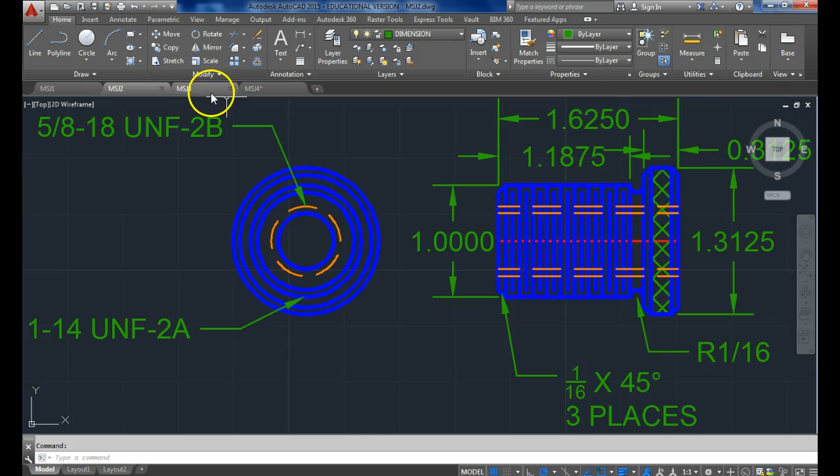Alright, now that I have all four parts - the base, the screw, the telescoping screw, and the end cap - now I'm going to put them all together.

So I'm going to open my title, file, save as, MSJ, assembly.

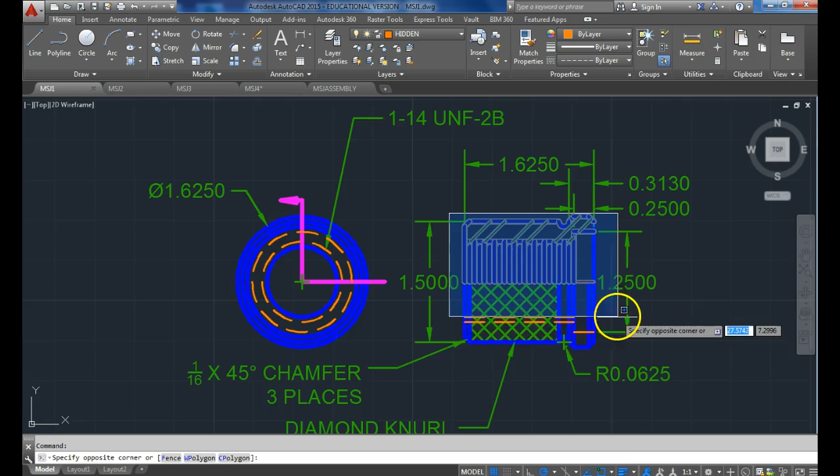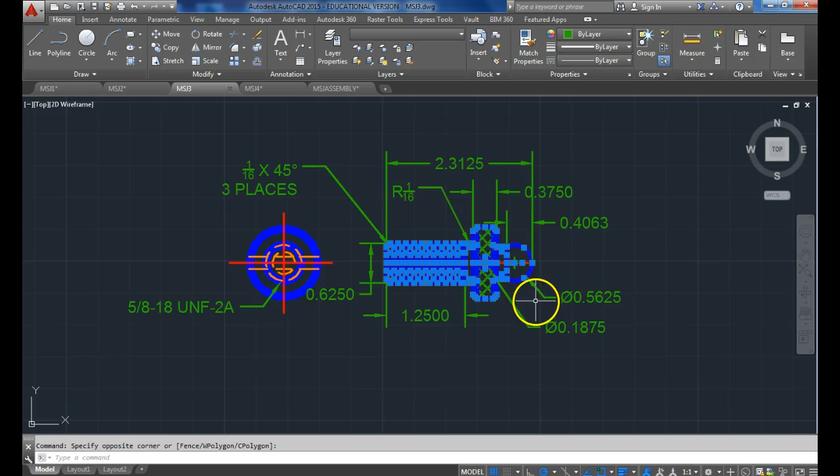Alright, same as before, I'm going to just cut and paste pieces. So here's part 1, part 2, part 3, and part 4.

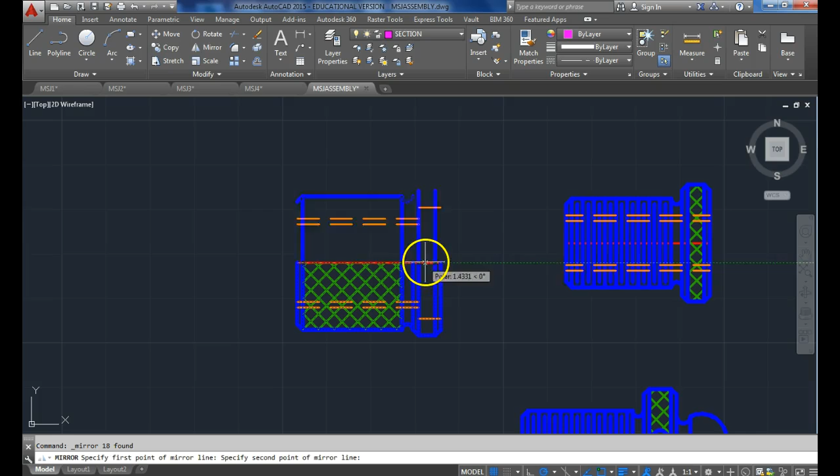Alright, first thing I'm going to do - I don't need the internal stuff, I'm not going to have the section view. So this one, I'm going to trim everything I can, delete all this stuff, and then I'm just going to mirror this whole thing up. That way it's completed, I have all my external stuff. You can get rid of the hidden lines.

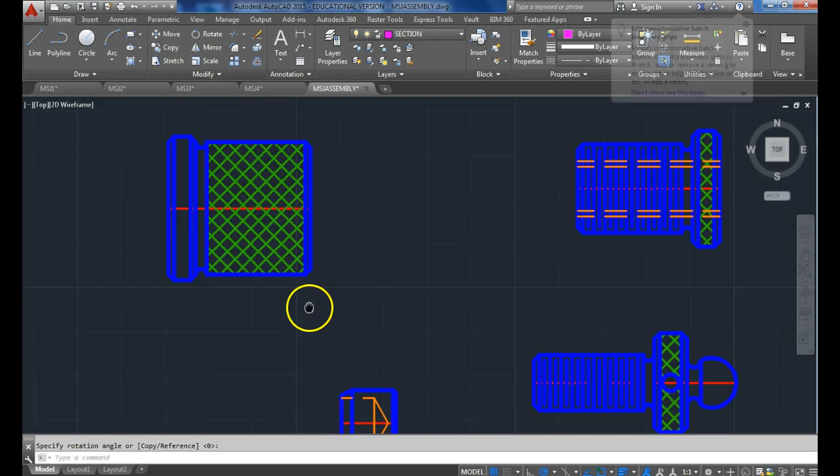And then I'm going to rotate it so it's facing the same way as the other ones. Alright, now putting them together in order. Next one is going to be part 2, the second thing we did.

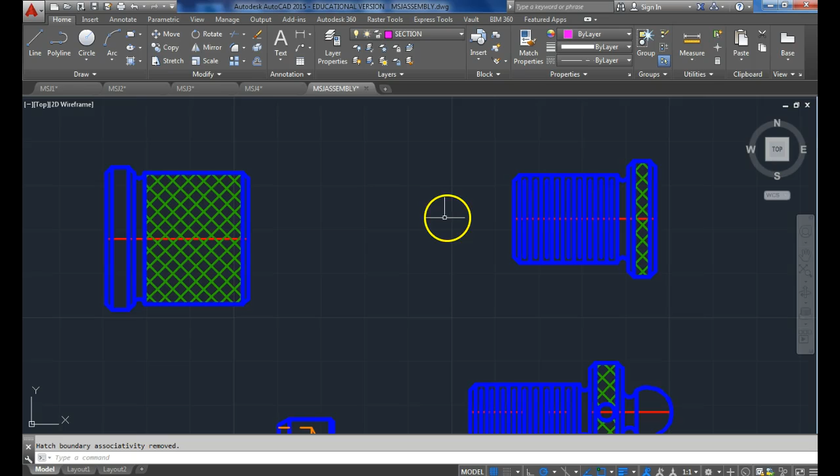And get rid of the internal stuff. They were internal threads in this thing. Here's external, they get put together. It's a jack for leveling something out, so how many of these threads is really how far you have it screwed in or out. What I'm going to do is leave one thread exposed.

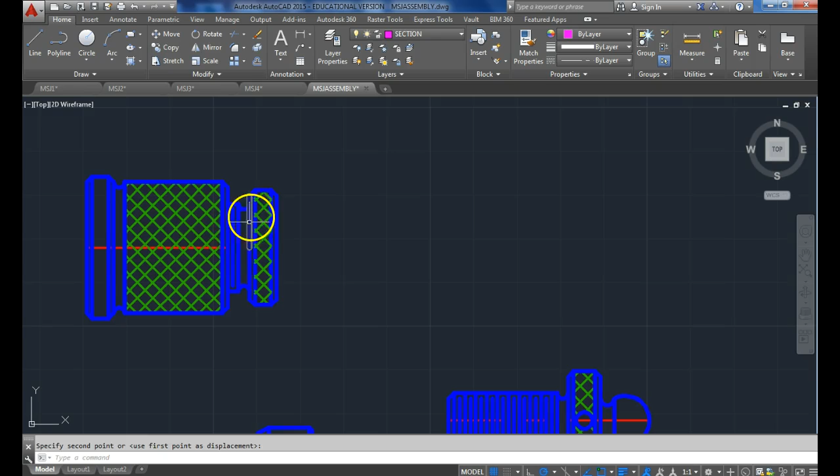Now I'm going to trim all this, delete all that. Move, select it, grab by this point, line up with the midpoint. So it's like I took this piece and screwed it into here.

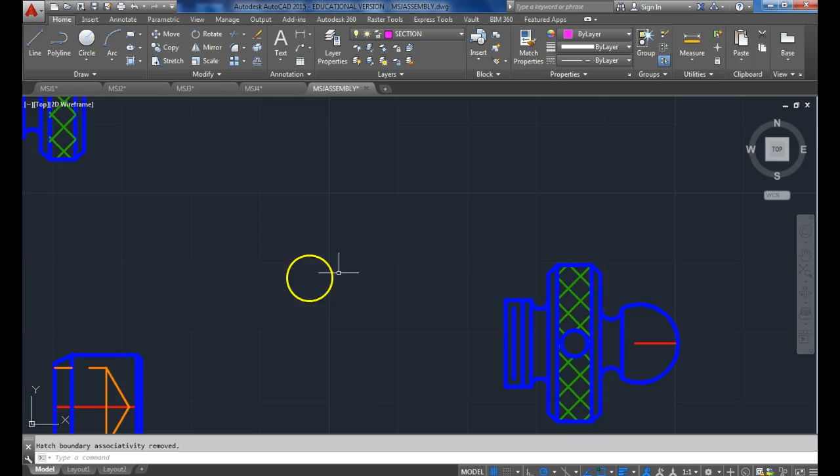Now this piece is going to get screwed into that one. I'll do the same thing - pick a thread to stop it at, trim the extra, delete what I don't need. Like that, bring it over, place it. Alright, those three are pretty easy to put together.

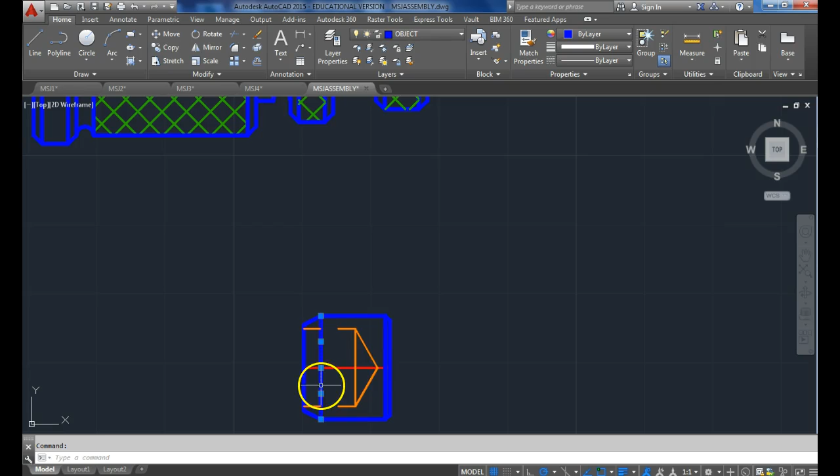This is the one that people tend to mess up on. We're going to do a section view on this one. So these edges that aren't on the outside, I'm going to get rid of. We're not going to leave those as hidden now - they're going to be an object.

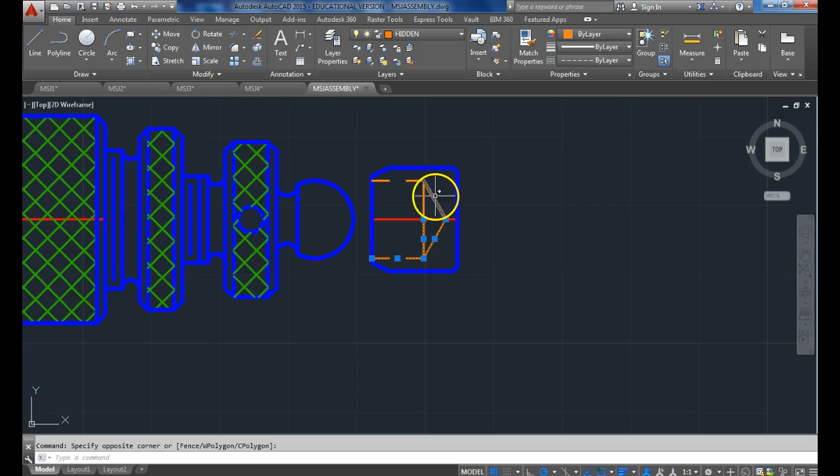I'm going to move like this. I want to align the center with the center of all this. Let me change these over to object.

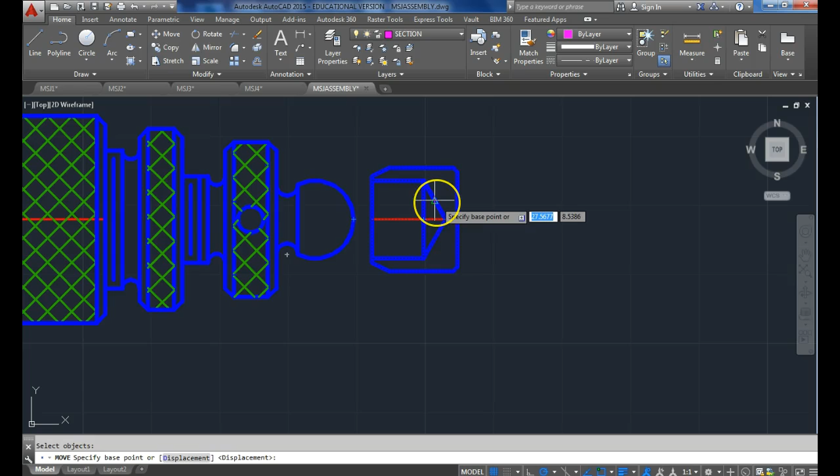Now, to move it over, take this whole thing, my point where I select it - if I grab it here and bring it to the circle, it's going to overlap these sides. If I just try and guess, it'll be close but won't be completely right. So I'm going to grab by this midpoint, bring it flat over. That line will end up being tangent to the circle, so it'll be touching exactly where I want it to.

I do trim this line. This one would go behind this little nub.

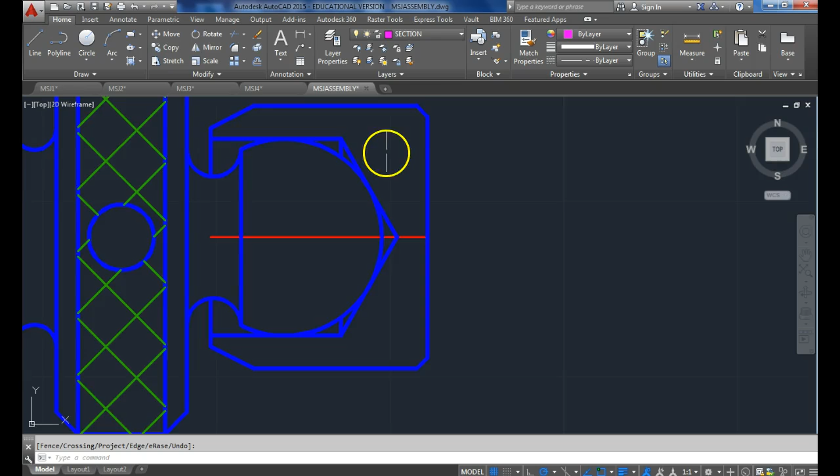Add in my dimension for the hatch, pop up here. Without looking at the paper, I think it's cold rolled steel. So let me go half scale.

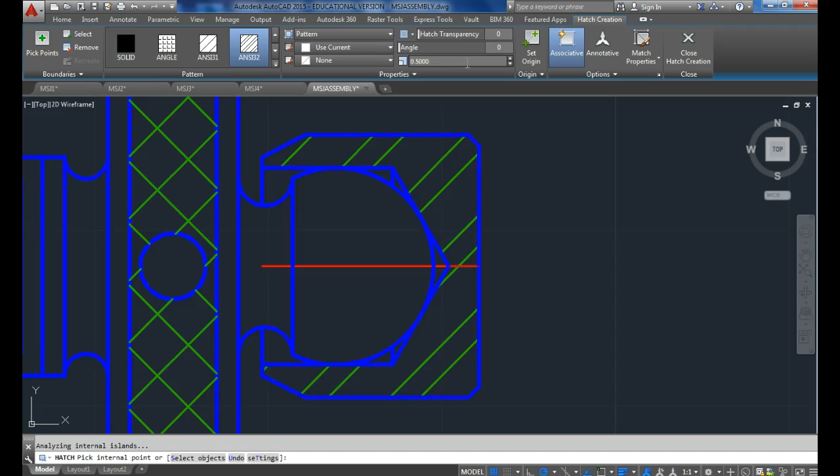Alright, so that's all the pieces put together. I'm not going to worry about the circles. You can do a dimension.

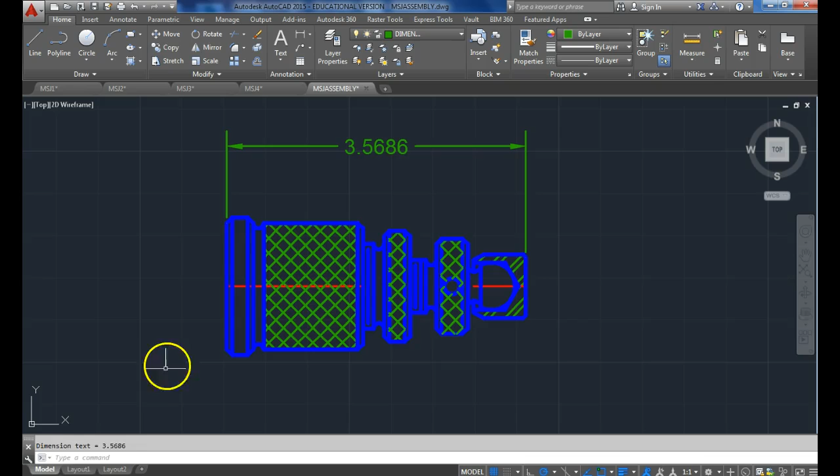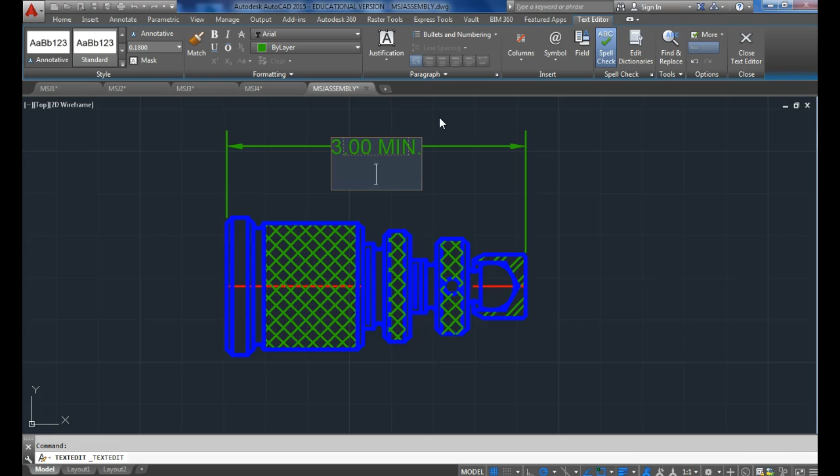Alright, for the dimension, again, it's adjustable, so I'm going to edit what it says here. Alright, it's 3.00 min, so that's the smallest it can be. And the biggest is 5.3125 max.

So that's the range. I'm going to label my parts: one, two, three, and four.

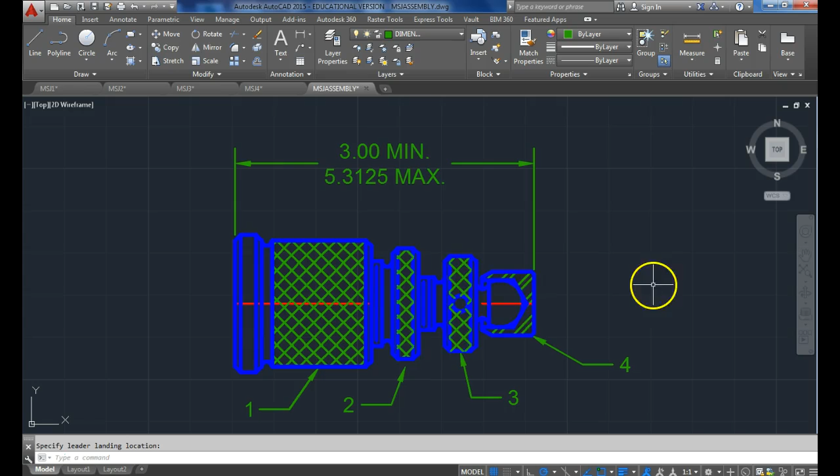All my pieces. Last two dimensions. I don't really need these, they're on the individual ones, but they're on the example one, so I'll put them in. So I have that there.

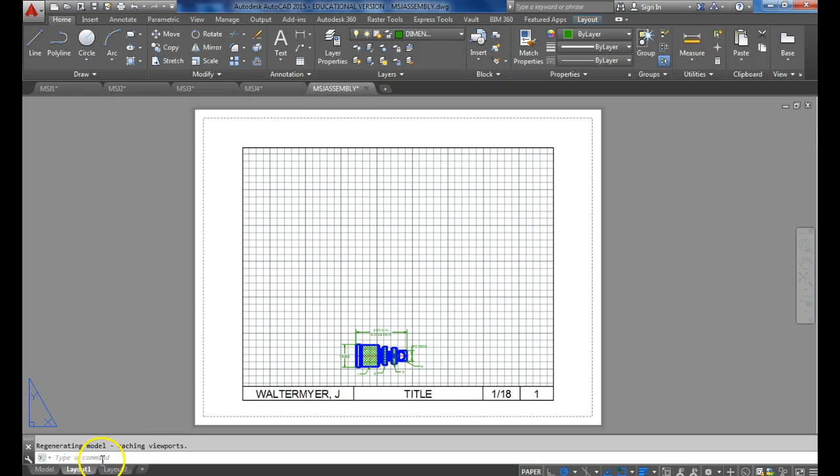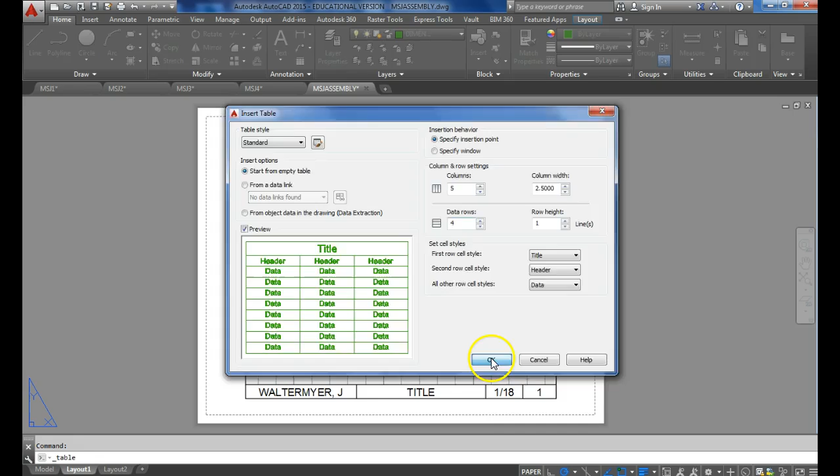Now I'm going to do my parts list. Click on the table button. 5 columns, we have 4 data rows. Click to place.

Move, select it, grab the corner, bring this over.

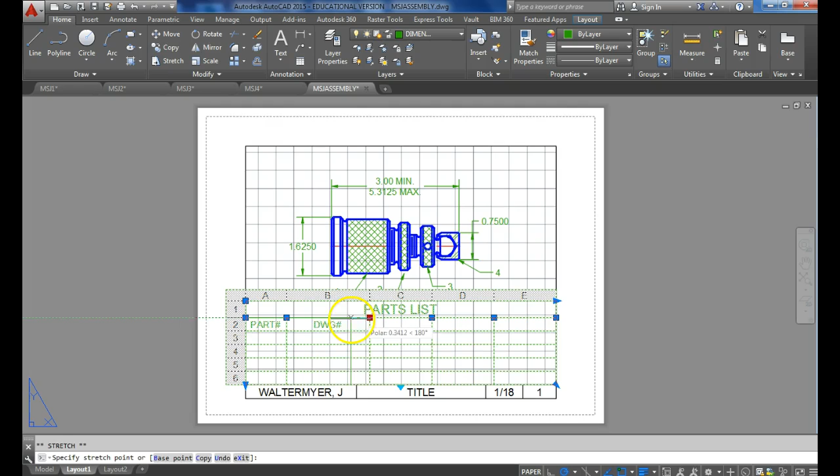Parts list: part number, DWG number, just these, over, more, QTY for quantity, description, material.

Quantity: 1, 1, 1, 1. Material: steel.

Part number 1, 2, 3, 4. MSJ1, MSJ2. Again, wherever you put the drawing number, you can put it in.

Base. Alright, there it's going to jump down to a second row, which is going to jack up my alignment. So let me shorten this up.

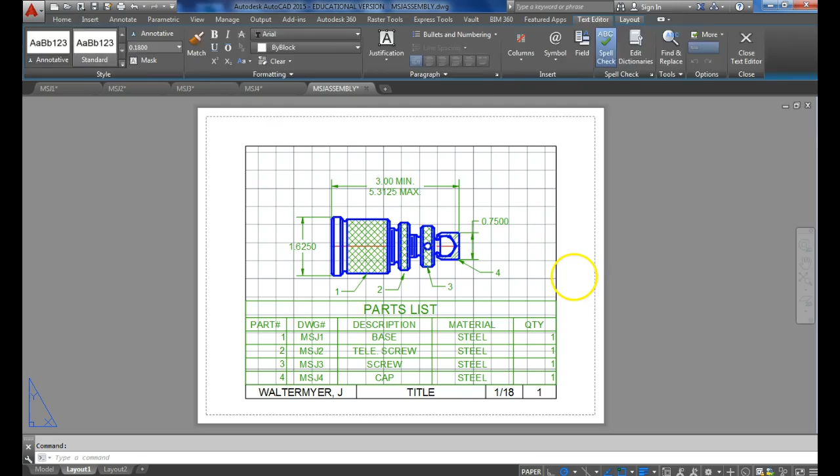Okay, there we go. That's all. You can print this one, print all your individual ones, save them together, hand them in, and then you're done with the last assembly drawing.